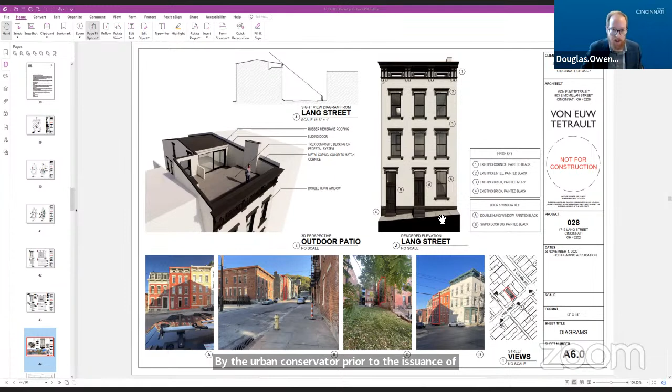So with that, staff recommends the Historic Conservation Board take the following actions based on plans by Von Euw Tetrault dated 11/4/22: approve a certificate of appropriateness for 1713 Lang Street, including any revisions submitted for permit subject to staff review and approval, with the conditions that: 1, the specific replacement windows shall be reviewed and approved by the urban conservator prior to the issuance of building permits; and 2, the building permits must be issued within 2 years of the decision date or the COA shall expire.

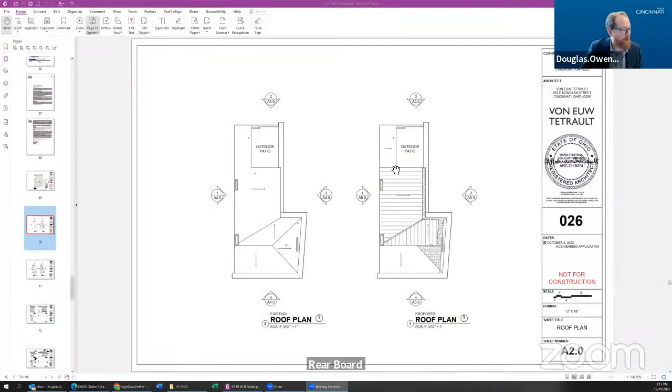Sorry, can you hear me? Yes, Doug, you cut out for just a minute there, but we can hear you. Okay, gotcha. So anyway, the dormer addition is proposed for the center of the building on the rear roof slope of the front portion, as well as the shed roof portion at the rear of the building.

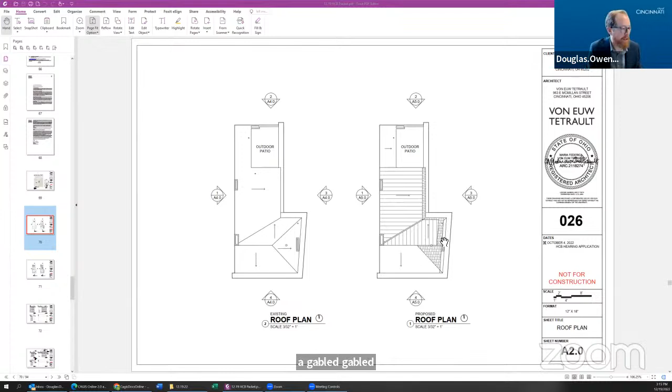So the dormer will extend to be just short of the existing wall plane. The applicant is also proposing, in order to make more of this 4th floor attic space usable space, to alter the hip roof portion on the east corner of the building to make that a gabled roof just on that corner. So the proposed dormer...

...will be clad in a flat metal paneling that will differentiate it from the original historic fabric. All right, sorry, can you hear me? Yes. Okay, my Zoom keeps cutting in and out, so I apologize, not sure what the issue is. So the gable end portion of the new roof line will be clad in fiber cement paneling that will also differentiate it from the original.

Generally speaking, staff is supportive of the proposed work. The dormer will not be visible from the front of the building when viewed from Milton Street. It will be visible from Highland Avenue when looking towards the side of the building, as that dormer does extend basically from the existing ridge line nearly straight out to the edge of the building, so it will have visibility from Highland, but not from the front street on Milton.

So staff does generally feel this is appropriate based on the Prospect Hill historic guidelines, because it will not be visible from Milton Street. While it will have visibility from Highland, this building is on the edge of the district, and it is mainly visible when you're standing across the street on Highland Avenue from outside the district, viewed back in towards the district.

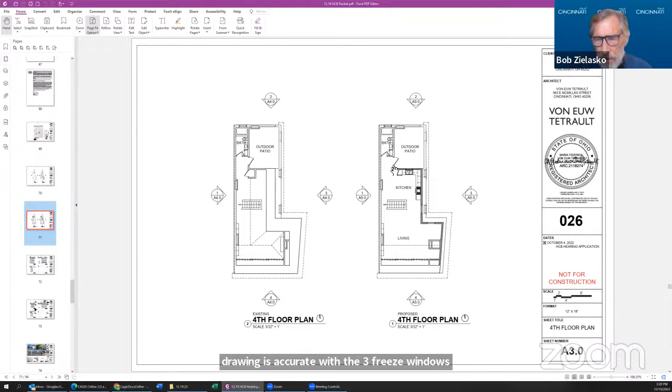Okay, so the dormers — if I'm looking at your sheet, and I apologize if I'm misreading this — if I look at sheet A5.0, the east elevation, Highland Avenue elevation, would there be like a little piece of roof on top of that? I guess, where is the window in relationship to the walls? To me, it almost looks like a window that's just laid flush with the slope of the roof. I don't see a third dimension to it, or where it falls in a room. What am I missing?

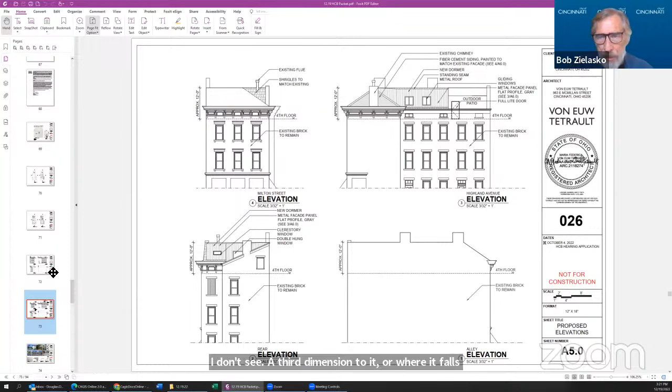So the windows shown on that sheet, there's the frieze windows here. Yeah, and there may be — would it help if you look at detail 2 on sheet A5.0? It points to a clear, what's it called — double hung window. That's actually the edge of the dormer. That's not really a window, that's opaque.

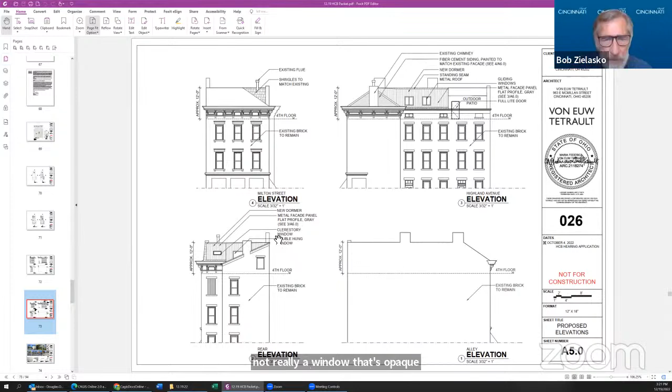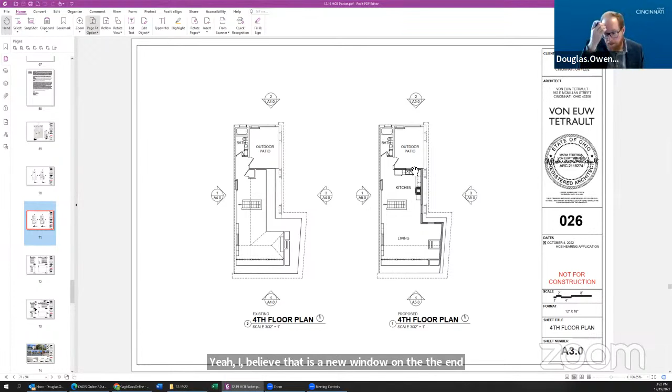Again, if I — oh, this window here on the rear elevation, just to the left of the chimney. Right, rear elevation number 2, yeah. I believe that is a new window on the end of the dormer. Perhaps the architect — that's correct, Doug.

You're doing great. So let me go ahead and swear in the architects here, Andrew and Frederica. If you could each raise your right hand, I need you to answer out loud. Do you solemnly swear the testimony you shall give will be the truth, the whole truth, and nothing but the truth? Yes. Yes. All right.

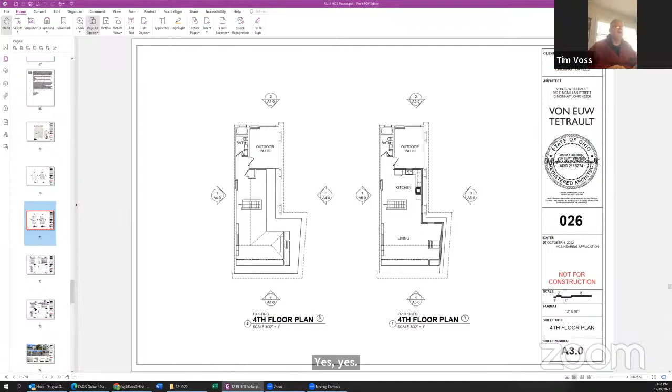Maybe you can explain our window issue. Yeah, so as Doug was just saying, there is a window here, which is the one you were seeing in the elevation just past that chimney. So that would be located here, right by the sink. Oh, can you even see my cursor? Sorry, no — someone's pointing at it, so.

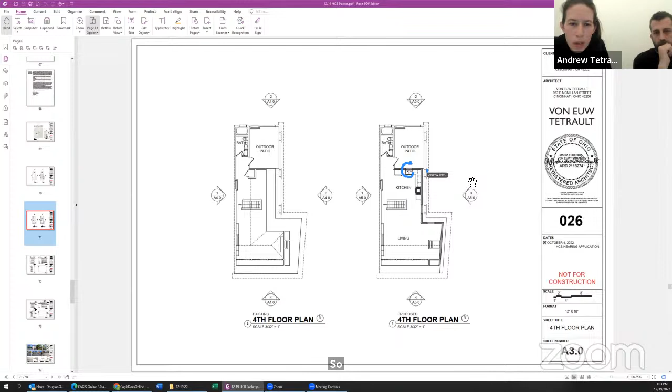Okay, right here. And then you were asking - I believe there are these frieze windows down here which would remain, but there would be 1 or 2 additional windows in the wall of the dormer. Those are under the eave. Is that right?

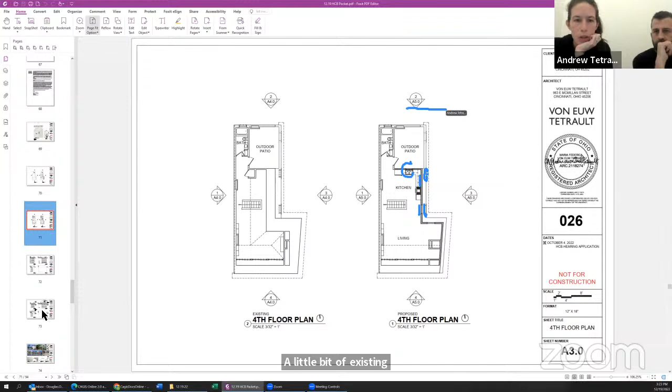Yes, I believe so. The wall of the dormer is held off of the facade of the building, so it steps back, which is why you see it very small right here - but this is a little bit of existing roof right there. And those 2 windows are the ones that end up sitting flush with the dormer wall here, if that makes sense. And then this portion here is the dormer.

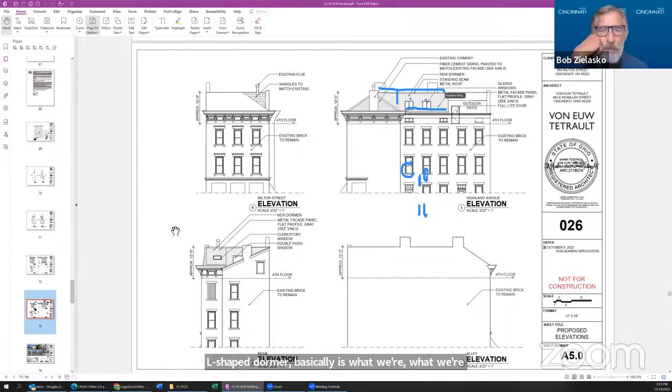It's an L-shaped dormer, basically, is what we're working with, with the parts behind. Does that clarify it a little bit? So it's actually - you've actually raised the entire roof, so it's not shedding there. Is that correct? Okay, got it. Now it makes sense, thank you.

Yeah, it's an older one. I'm good - other questions or comments from the board?

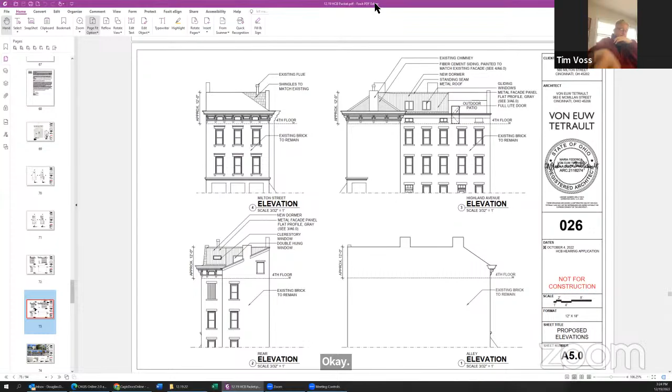Absent that, I will entertain a motion. Mr. Chairman, I'd like to make a motion to approve the certificate of appropriateness as laid out by staff.

Second. I have a motion and a second. Ms. Smith Dobbins, yes. Ms. McKinsey, no. Mr. Zielasko, aye. Mr. Weiss, aye. Mr. Young, aye. Mr. Sunderman, aye. The chair votes aye. We have a split decision, but 560 Milton is approved.

All right, the last thing I have on my agenda is we need a motion to approve the November certificate of appropriateness on the staff level. Do I have such a motion? So moved.

I'll second that. Second. All right, we have a motion and a second to approve November's COA approvals. Mr. Zielasko, aye. Mr. Weiss, aye. Ms. Dobbins, aye. Ms. McKenzie, aye. Mr. Young, aye. Mr. Sunderman, aye. The chair votes aye. Do we have any other business?